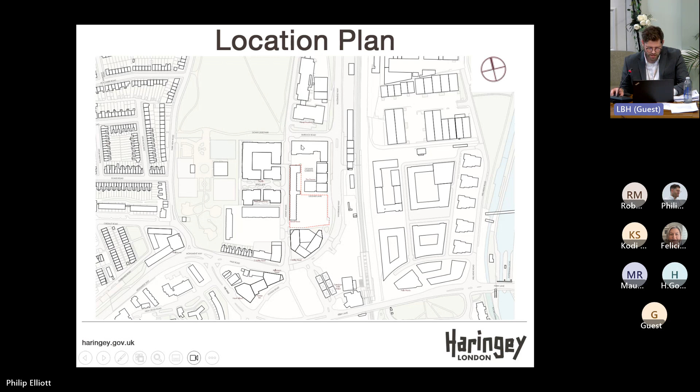So the District Centre Framework, which was issued back in 2015, acted as an evidence base to inform the Tottenham Area Action Plan to allow for the implementation of proposals in and around the Tottenham Hale District Centre. The framework helped to form the strategy and the development within Tottenham Hale. The DCF District Centre Framework identifies the site as being suitable for medium-rise buildings and for mixed-use schemes of high-density businesses and homes occupying converted and new purpose-built accommodation.

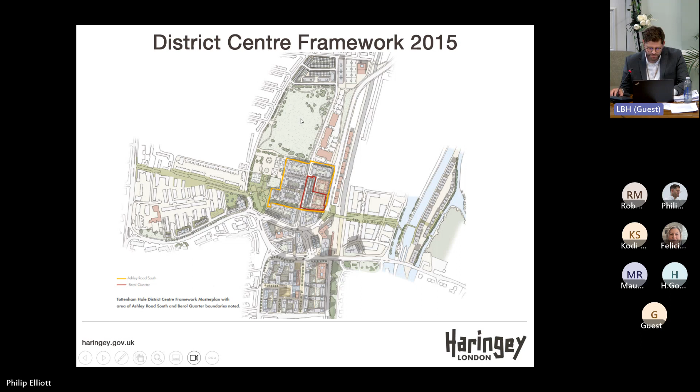The site falls within site allocation TH6, which is identified in the Tottenham Area Action Plan. The site allocation seeks to create an employment-led mixed-use quarter north of the new district centre. It also intends to create a new east-west route linking Down Lane Park and Hale Village, and enhancements to the Ashley Road public realm. And it also states that residential use will be permitted to cross-subsidise improvements to the employment stock.

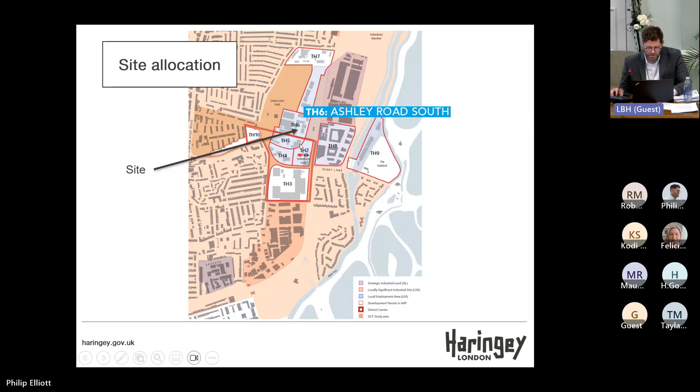A master plan was developed for TH6, called the Ashley Road South Master Plan, or ARSM. The buildings which form the ARSM are developed by the applicant and by Notting Hill Genesis, who have worked collaboratively to deliver a master plan for the whole site.

The master plan has been split into 4 permissions, which include Ashley Gardens, to the left-hand side of the image, Ashley House, on the west side of Ashley Road, the other side of that red line, Cannon Factory, to the north of the image, and then the Berol Yard site.

Ashley Gardens is nearing completion. Rosa Luxembourg has been completed, and the rest of the development is almost completed. The Notting Hill sites at Ashley House and Cannon Factory have been implemented but haven't come forward yet. And the Berol Yard site, the Gessner, has been implemented, but Berol House and the college building haven't started and haven't progressed.

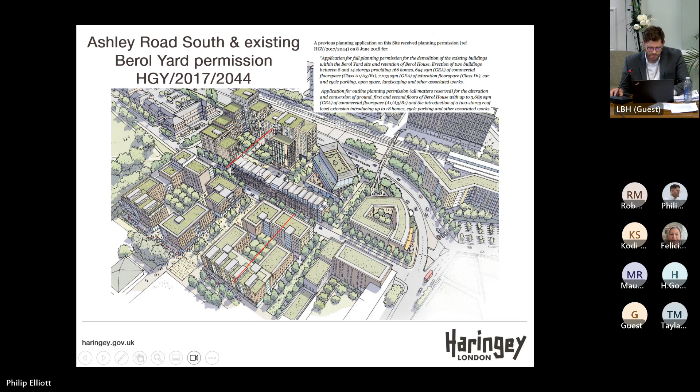Within Berol Yard, the permission included a 2-storey extension to Berol House, which would have had 18 homes in the roof extension, and the Gessner, 166 build-to-rent homes in a Part 8, Part 14-storey building, which is completed and occupied. It also included a college, with over 7,000 square metres of education floor space.

As I was saying, the college and Berol House have not been progressed, and extensive marketing has been submitted by the applicant to show that the college is not feasible and won't be coming forward. There's also a linked application which has been submitted, which would vary the relevant conditions attached to the extant Berol Yard planning permission.

This would enable any reference to phases of the scheme that are no longer intended to be delivered to be removed - so that's largely Berol House and the college building. This would be dealt with if these proposals were to get planning permission this evening.

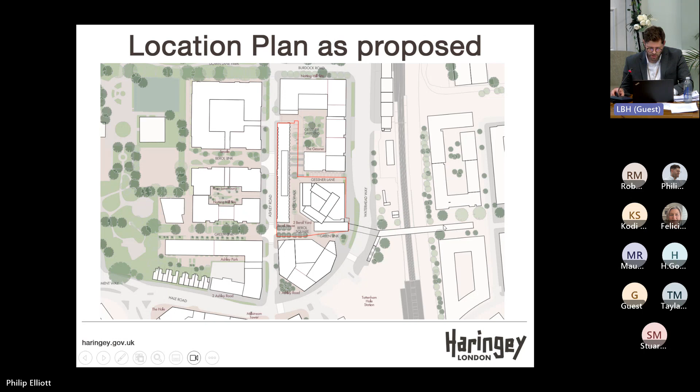So just some details about the proposal. It includes a 3-storey roof extension to Berol House, the locally listed building. There'll be an uplift in commercial floor space of almost 2,200 square metres. The Berol Yard development would be a 32-storey building with 210 build-to-rent homes, over 700 square metres of commercial floor space, and 161 square metres of community floor space at first floor level. It would have 35% affordable housing, and would also include enabling works for the bridge.

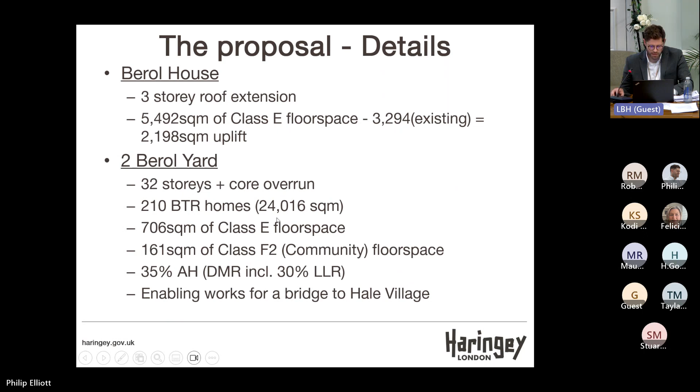So a little on build to rent. The London Plan acknowledges that build to rent developments can make a positive contribution to increasing housing supply and are a beneficial form of development. Policy H11 of the plan is used to assess build to rent proposals. The proposal before you today complies with policy H11 and would meet the requirements to follow the fast track route where viability is not tested.

The London plan seeks unified ownership and management of build to rent proposals, and therefore allows the affordable housing offer to be entirely discount market rent, which is an intermediate banding, as this enables the affordable element to be owned and managed by the build to rent landlord themselves.

30% of the affordable element would be London living rent housing, and 70% would be let at a discount to market rent. The 2 beds would be let at 25% discount, and the 3 beds of the affordable element would be let at 35% discount from the market rent. Priority would also be given to Haringey residents, and particularly families with children would be prioritised for the 2 and 3 bed homes.

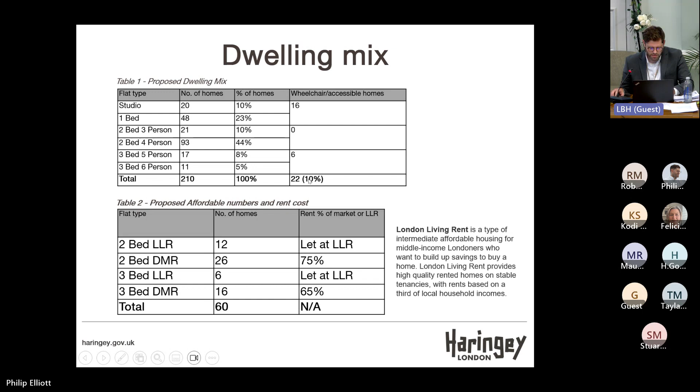So of the 210 homes, 60 would be affordable, with 18 of those let at London living rent levels and 42 at a discount to market rent. That would equate to 26 2-beds let at a 25% discount, with 16 let at a 35% discount. These proposals are supported by Haringey's housing team.

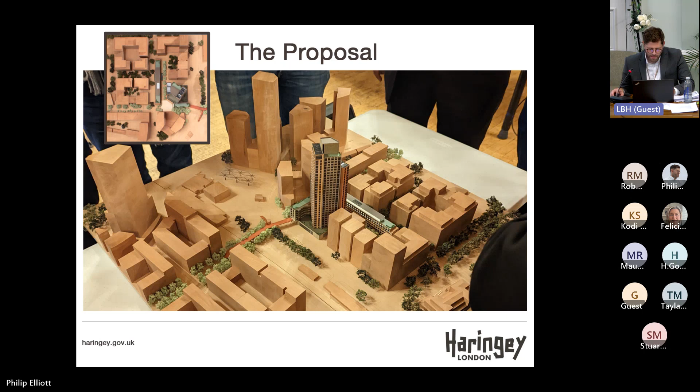This is an image of the model looking towards the east. It shows Barrow Square and Berol House and the extension to Berol House in the lower part of the picture. It also shows the Green Link building, the 6-storey building, which would have the bridgehead and would then lead to the potential future bridge over Watermead Way and onto Hale Village.

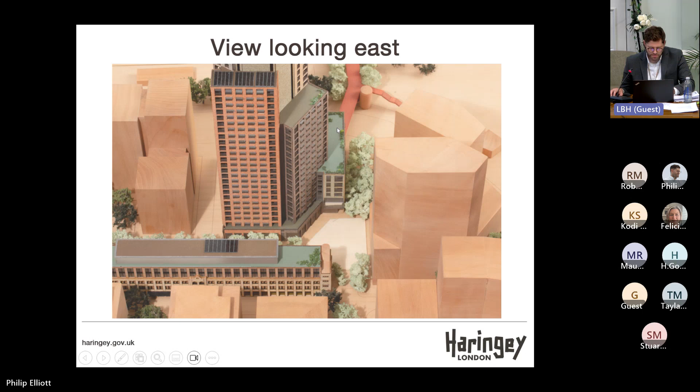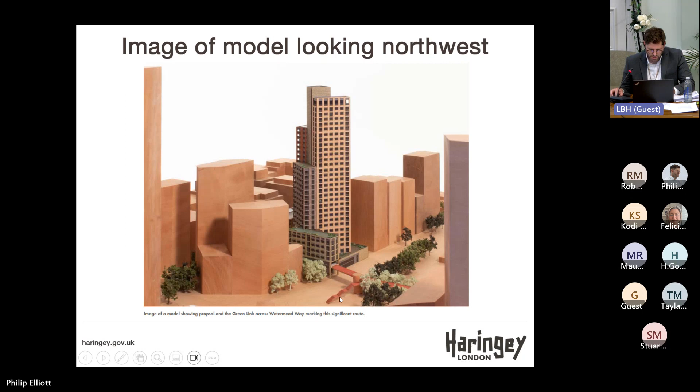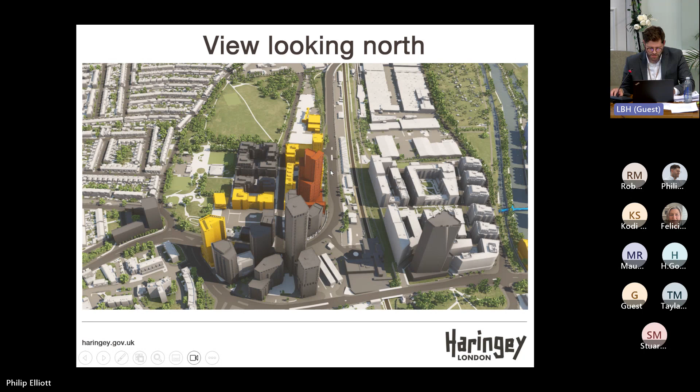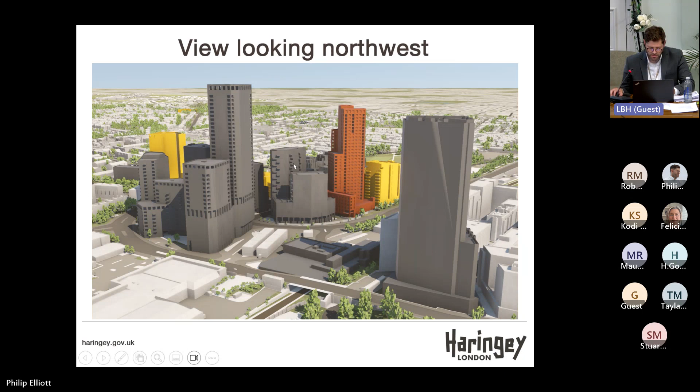This ViewCity image shows the constructed Anthology building right in the foreground, those Argent buildings that are yet to be constructed, and then the application building in red, with the Notting Hill building in yellow just to the north of that, which hasn't broken ground yet.

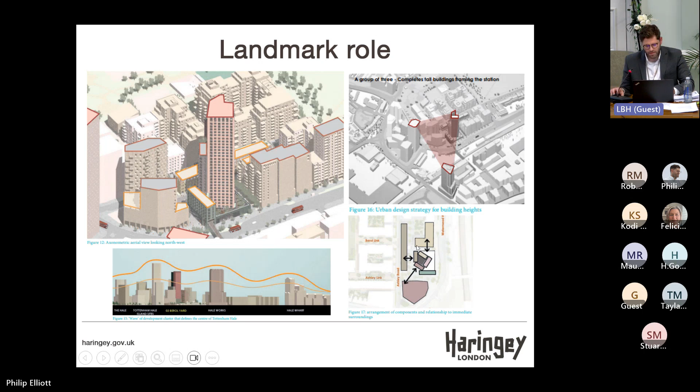The other images show how the building fits within the emerging massing wave in the district. The bottom right image shows some of that materiality and how the colouring of the buildings has sought to reflect some of the materials of the elevations that each individual block faces.

So the proposal would provide a new bridgehead to support the delivery of a potential future bridge over Watermead Way and the railway into Hale Village. The applicant would develop a stairway, lift and landing platform within the 6-storey building within their site, which they would manage. The applicant will also be required to fund and produce a feasibility study for the bridge over Watermead Way and over the railway.

The contribution in the form of the bridgehead is considered to be reasonable, and it's noted that future developments will also contribute to the delivery of the bridge as and when this is feasible.

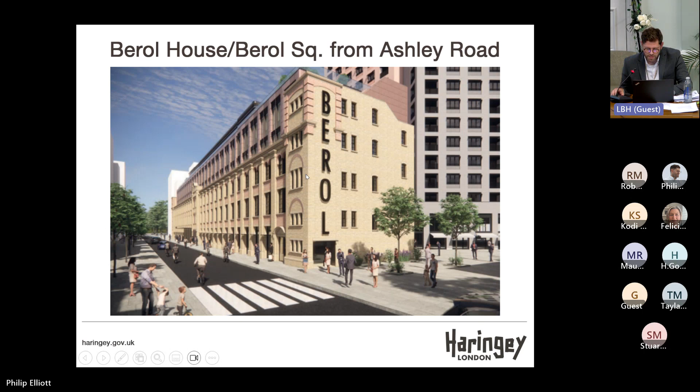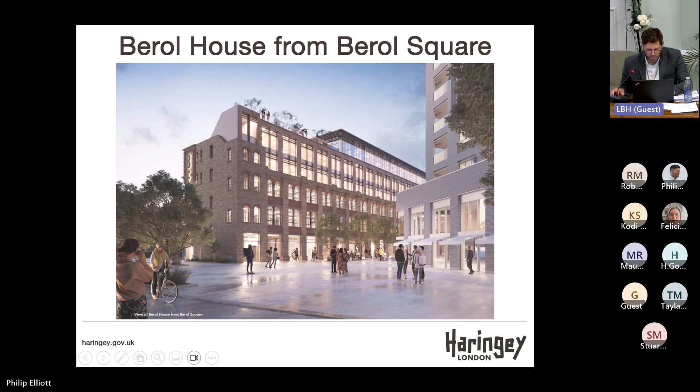This is an image at dusk showing Berol House looking towards the northwest from the square. It shows the activation and the shop fronts within that square, within Berol House and the Two Berol Yard building.

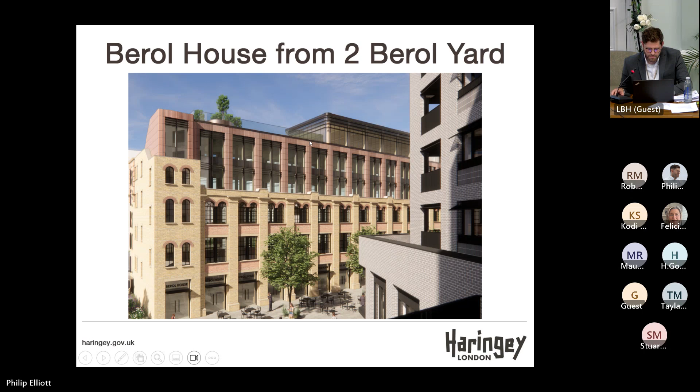This is an image looking east through the square, showing that walkway up to the potential future bridge. There's also community use at first floor level with a platform that looks out over the square, and you can see the spaces and activation going on there.

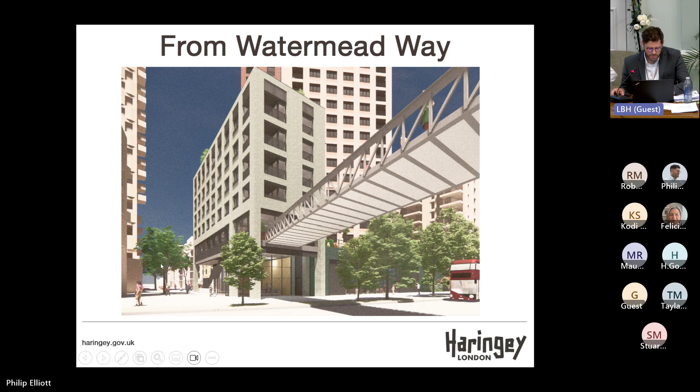This image shows a view looking northwest from Watermead Way, showing the potential future bridge, and also to the bottom left-hand corner of the image, that link - Ashley Link and Green Link - back to the west.

The proposals would introduce a new square and a piece of public realm to the district that would provide activation and host public art. It would be a high quality public space that would provide pedestrian routes through the site east and west.

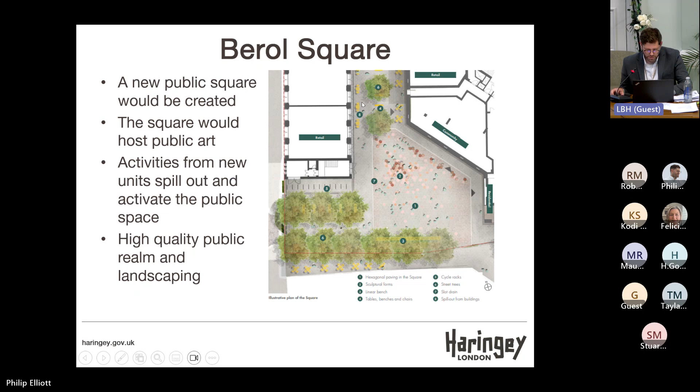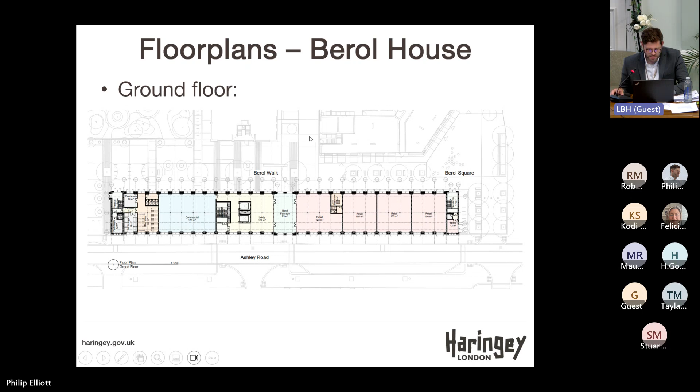Moving onto floor plans of Berol House. Berol House is to be altered to allow increased movement through the building, which currently acts as a barrier from east to west movement. The ground floor would have several shop fronts and openings that would activate Ashley Road and the public spaces to be created within the site further to the east.

Two Berol Yard would have the majority of its ground floor activated by commercial spaces, but there's also some car parking and plant and storage space for refuse. The mezzanine level just above includes the majority of the cycle parking and the rest of the plant space. The commercial units within the building would be double height on the whole.

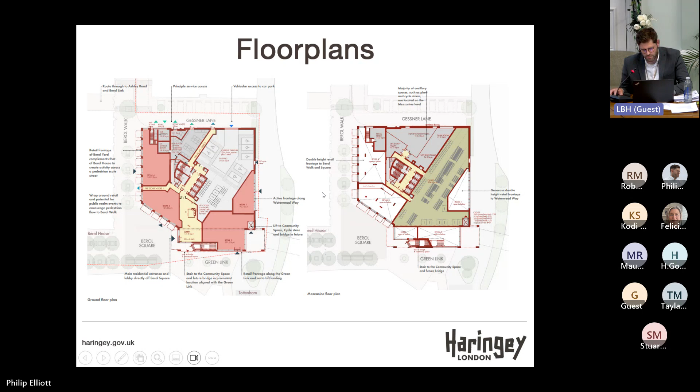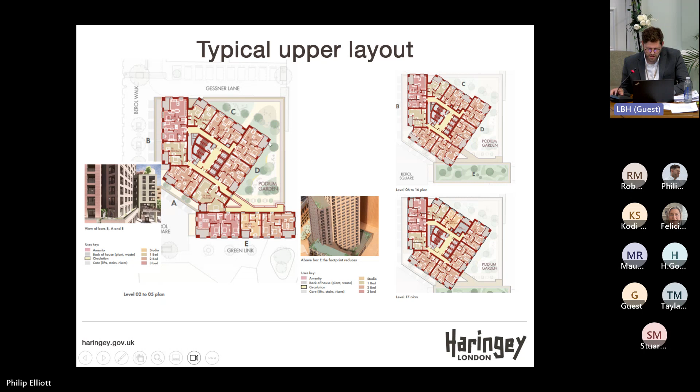33% of the units would be enhanced single aspect, meaning they have glazing located on a second facade to the balcony serving the home. You can just about see it in the corner of these images, where there's an increased aspect beyond single. 65% would be dual aspect, with 2% triple aspect. Aspect has been enhanced as much as possible given that it's a tall building, using the blocks and orientation of the building to do this.

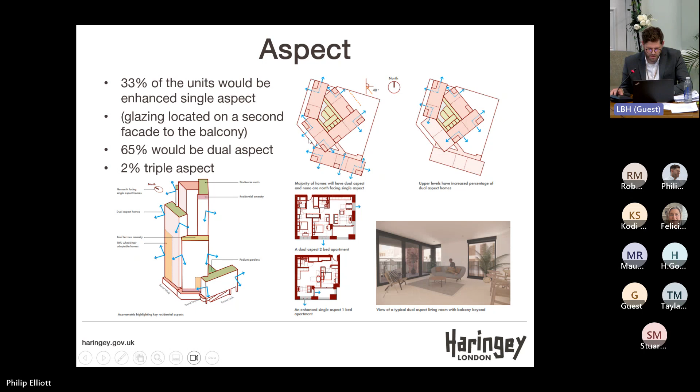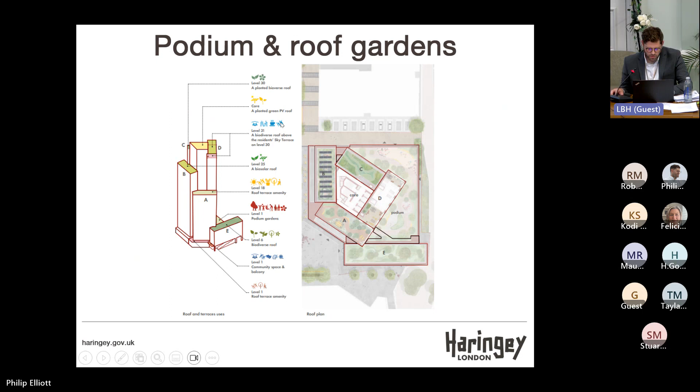The building would utilise its podium and roof space to provide amenity and play spaces for residents. There would be a large podium garden at level 1 with a roof terrace amenity space at level 18, all accessible to all residents. Other roof spaces would be used for planting, green roofs and solar panels.

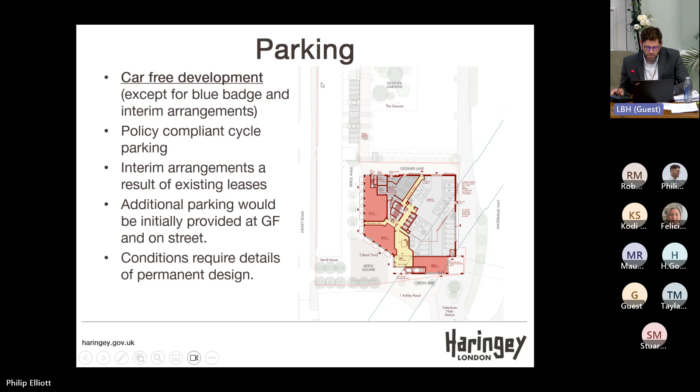The development would be car-free except for blue badge parking, but on an interim basis there would be additional parking at ground floor level and to the rear of Berol House within the site. This parking is required as a result of leases that are yet to expire, which give current tenants the right to park on the estate. As part of the conditions, details of the timeframe for removing the additional parking are required, ensuring the interim arrangements cease as soon as possible. The proposal also has a policy compliant level of cycle parking.

In summary, the proposal is a well-designed mixed-use scheme of build-to-rent and commercial spaces that fulfil the requirements of the site allocation. 35% affordable housing, consisting of London living rent and discount market rent, is proposed, which satisfies policy H11 of the London Plan and the council's housing strategy. Two Berol Yard is a high quality tall building that is supported by the QRP and would act as a landmark within the wider area.

The scheme would create significant new employment opportunities. It would include a new community space and the bridgehead, which would safeguard the potential future bridge and complete that east-west connection. It would have acceptable neighbour impacts and an acceptable impact on built heritage, as well as acceptable transport impacts, with it being car-free except for the blue badge spaces.

It has a high level of sustainability with connection to the district energy network, has enhanced tree provision and greenery, and the Health and Safety Executive have reviewed the scheme and are content with the proposals. So the recommendation is as set out from page 2 of the agenda item and in the addendum report. In summary, officers recommend to grant planning permission subject to the signing of the Section 106 legal agreement.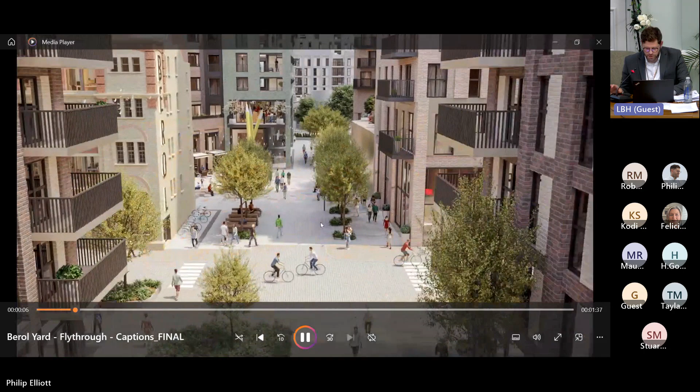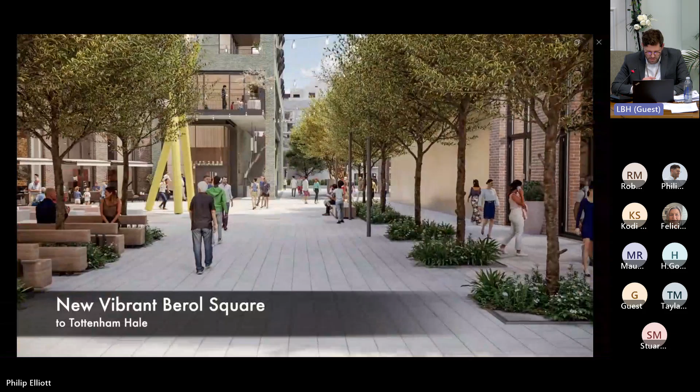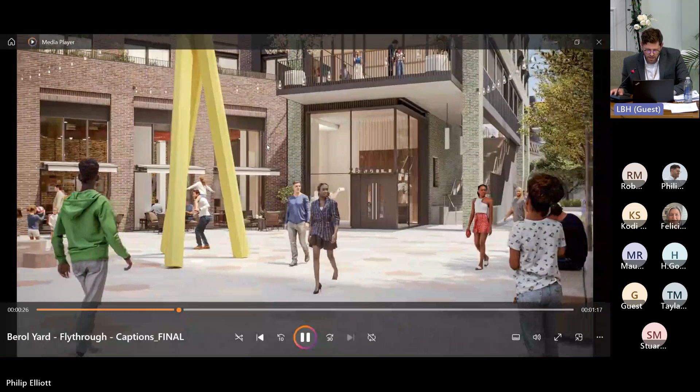This just shows coming in off Ashley Road, looking east as you walk through Berol Square, and you can see the staircase leading up to the potential future bridge. You can see the community space at first floor level, and the lobby entrance to the residential units. Moving around the square, you can see Berol House to the left, and the new street that's created.

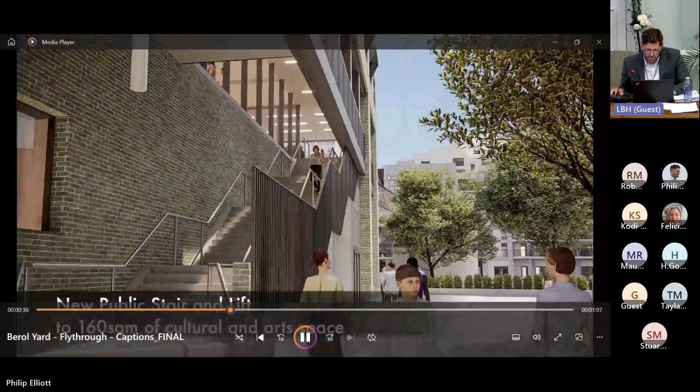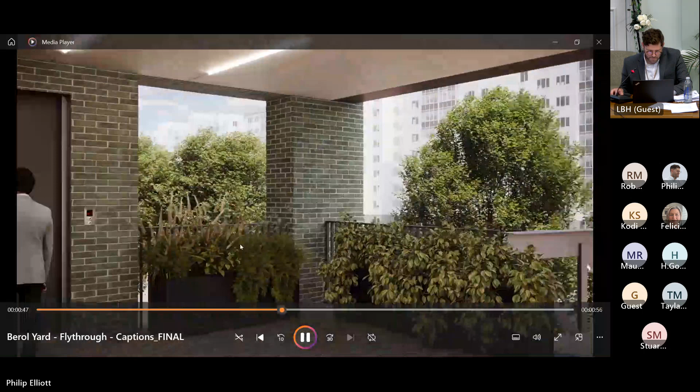This is going up the walkway now to that bridgehead landing platform and the community use. This just shows that community use, and then a view out into the square.

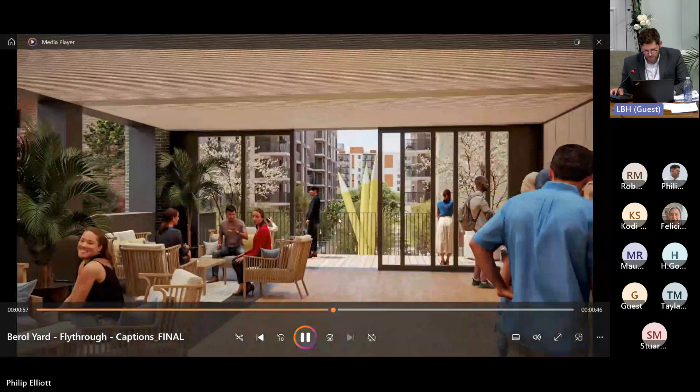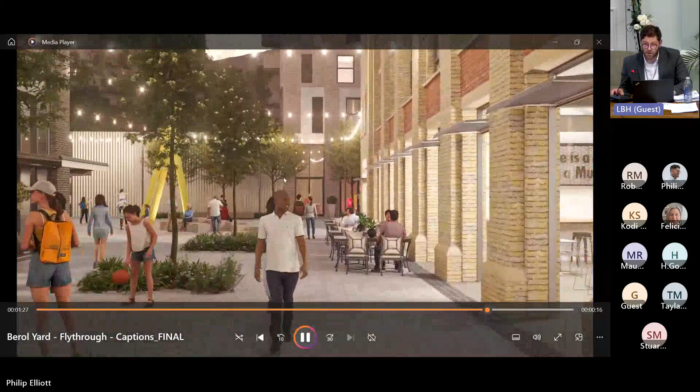This is the new street with Berol House on your left and Berol Yard on your right, walking up towards the Gessner. It shows some of the activation going on at the ground floor, and then also at night time, showing the activation and highlighting that the space, the square, is available for public art.

Dunstall. Hi, thank you. I've got three points I was hoping you might be able to pick up on. The first is, I believe on page 19, regarding property sizes and the volume of people occupying those properties. So we've got 3 beds with 5 people, and so on. I'm just wondering what kind of family makeup we're presuming will be in there. On page 15, is that kind of appropriate? I'm assuming we'll have children sharing bedrooms. Is that something we are happy with and endorse?

Could you speak to that? The second one is around page 76, the NHS ask. I see that the NHS asked for a contribution of just over £230,000 to support increased health infrastructure capacity, over and above the need they would be able to meet through GP practices, and what's being offered is about 25,000. I just wondered if you could speak a bit more about how we concluded that - well, I can see how we concluded it, but how that fits and what knock-on pressures that will cause.

The third one is just about the bridge. I've had a look at the model, and I can see that it joins the building at one side, and there's a kind of walk through. There are large estates - specifically I used to do some work in Southwark, the Aylesbury and Heygate estates, where there was this ideal of raised living and people would move about. I know it's a bit different, but that kind of single access raised entry does risk antisocial behaviour and criminal activity being more difficult to address and monitor where you've got that single route in, single route out. I'm just wondering what, if anything, is being considered in that regard. I think those estates in South East London have broadly been deemed not great and knocked down, haven't they? There wasn't great planning there.

First of all, a correction of a small detail at page 23, paragraph 3.24, second last line. It talks about Harris Academy providing education for children between 11 and 18, but that's not correct, because education at Harris Tottenham starts at 4 to 18. It takes children through every stage of their education life. I just wanted that correction made.

But it baffles me why we need a 32-story tower at Tottenham Hale, less than 5 minutes away from where that proposal is - the Welbourne Centre, which is 30-something, in that sort of region. We see it being built out now, and it's not the most glorious sight you ever hope to see, in Tottenham or any other place. So I don't understand where the inspiration comes from that we need a 32-story tower in Tottenham with all sorts of stupid other connotations running around there.

We recently had a meeting as Tottenham Hale councillors with local residents at the Rosa Luxemburg house, which is on Ashley Road, within the Ashley Road context. A couple of things they were concerned about: one was smoking illegal substances - I'm not suggesting we can do anything about that, just mentioning it. And the second thing they were complaining about was lack of parking space.

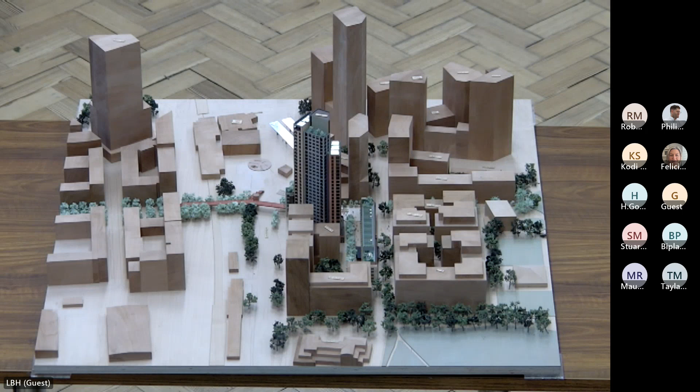Okay, so there are no objectors for this item, but we've got the applicant team here who are able to answer questions. Can you come forward, please? You might need to.

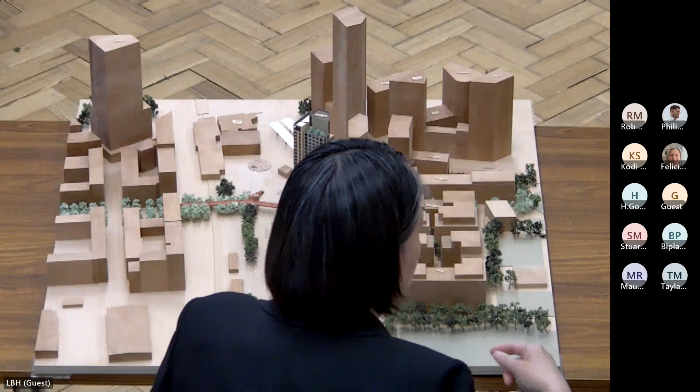Thank you. So you're sharing microphones, but could you just quickly introduce yourselves, please? I'm Paul Eaton from Allies and Morrison Architects. Jonathan Carkeet, Berkeley Square Developments with the developer. I'm Ben Kelway from Lichfields Planning Consultants. Aidan Potter from John McAslan and Partners. Paul Honegraff with Berkeley Square Development.

Okay, thank you. So do members have any questions? Yes, they do. Any questions for the applicant team? And we'll start with you, Councillor Emery.

Thank you for this. So visiting a nearby development, there were some issues with the bin facilities. They were overcrowded and you actually couldn't access some of the recycling facilities as well. At 6.17.4, you can see that we already know that the bin space isn't enough, that's noted in the remarks. I think if you look at the size of the room, so if you look at - yeah, I'll let you get to the point I was making first about 6.17.4.

Page, please, 91 was it? Thanks, 91. 6.17.4. So you can see the facilities aren't enough in terms of requirement. We think we're going to have problems there. But then if you look at page 133, the Barrel Yard ground floor plan, you can see it's quite an awkward shape. Now, I think one solution would be to move the 14 square metre retail bin space onto the corner, onto retail space 4. I think this problem very much concerns me because it's going to be a problem we're going to have in the future, and it would be much easier to solve it now rather than solve it later when we can't actually build or move anything.

Thanks very much for your question. So at the moment, the refuse collection has been designed on the basis of twice weekly collections on a managed basis. So this is a build to rent scheme, there's a concierge service, so waste is managed, including things like a compactor. But also, because of the management company, we've seen it with the Gessner building next door, we work very hard with residents to maximise recycling, and that allows us to reduce the size of the waste storage. I agree with you, it's a challenge because there's a reconciliation between creating that active ground floor and that corner unit which you identify. And the great thing about that unit is it turns the corner and allows us to have that sort of visual line with the offices. So it's a challenge where we increase the size of the footprint of refuse collection, and because it's a privately managed building, we can manage that space very actively.

Okay, thank you. Do you want to come back on that? Are officers fine with that situation as it stands? Do you see any concerns? Yeah, so we've sort of put in that fail-safe so that we've got the monitoring there, and if it does require that extra collection, then we've got the payment there to cover the extra vehicles that are needed.

Okay, thank you. Any Councillor Bev? Yeah, so it mentions on-site presence. Can you explain what on-site presence means? And is it 24 hours? And does the on-site person have a separate unit that he sits in or operates from? I mean, you just talked about the rubbish, which is really crucial, because when we visited Rosa Luxemburg, I don't think we've actually got that quite sorted yet. It does give a really bad impression when residents go in to do their rubbish and it stinks, so I think - but we talked about that.

And then you talk about skilling up existing workforce, apprenticeships. I wonder if you have any intention to use CONEL, because CONEL have a big new apprentice centre at Meridian Water that's just been opened. I'm wondering whether you're going to use that facility to train up some of the youngsters you're going to have as apprenticeships. And then the last point is, how do these rental units work concerning Airbnb? How do you control that?

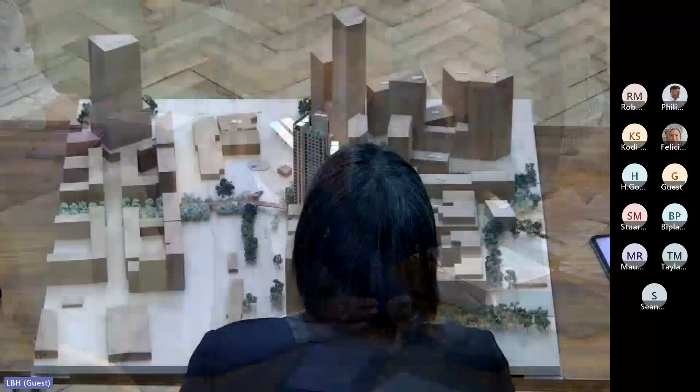Well, I was going to follow up on the college because I like the sound of the college so much, and just wanted to know how that happened, that it fell away.

The college came to us via the council, Ada College. They were funded by the DFE and the GLA. They prepared a design for a building which we warmly supported. We obtained that planning permission. We cleared the site for them. We demolished everything, all of our buildings, which were providing us with a rental income, and we hoarded the site and made it ready for them.

And when they came to buy the site, they did not have the money to build it or buy it. We extended the contract by 12 months. We went to the Department for Education. I went to Westminster myself to try and persuade the DFE. We offered to build them the building and rent it back to them, but they didn't have any money. So we gave them essentially, in the end, I think 15 months beyond the end of their contract to try and buy it and raise the money. And unfortunately, the GLA, the council, the DFE could not afford that.

So we subsequently appointed Knight Frank's specialist education team to go on a countrywide marketing. We built a website. I put hoarding up with nice images of what it could look like. And I went to meetings with universities in London and across the country. We went to life sciences, and the location doesn't suit. And the building that they designed is very bespoke, and it wasn't something.

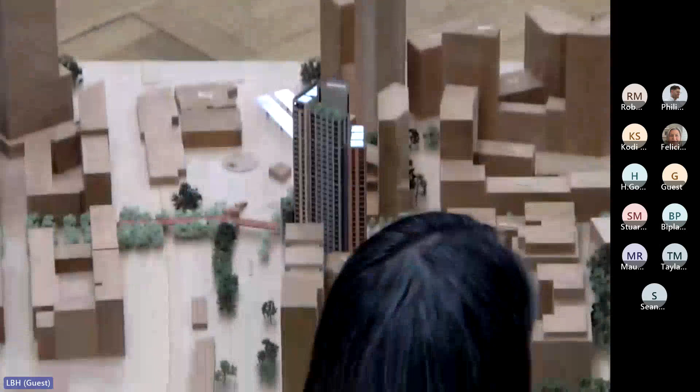Thank you. Councillor Jamieson, did you want to come in? I wanted to ask about allocations - are we intending for this building to house Haringey residents, people who are already on our housing list?

No, that's not the case. Anyone over London can get a home at 75% of rent in one of these buildings, but it's not going to our residents first. No, actually it is going to our residents first - they would have priority.

We can't rule out that someone on the housing waiting list won't take up one of these units. If they can afford the London living rent, they could, but it won't be the highest priority for people looking for social rented units. The priority is for local people and local families, so we have a marketing period for local Haringey residents and priority for family occupiers. Yes, that is to bring it in line with our intermediate housing policy, which is to prioritise family housing for people in need.